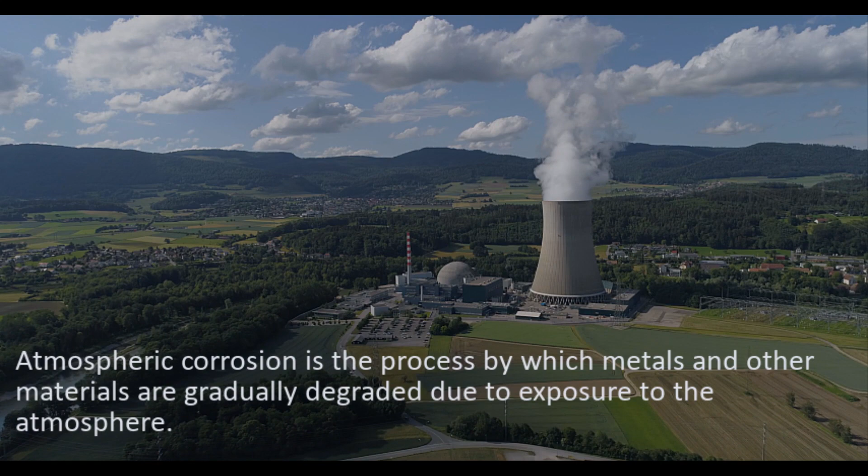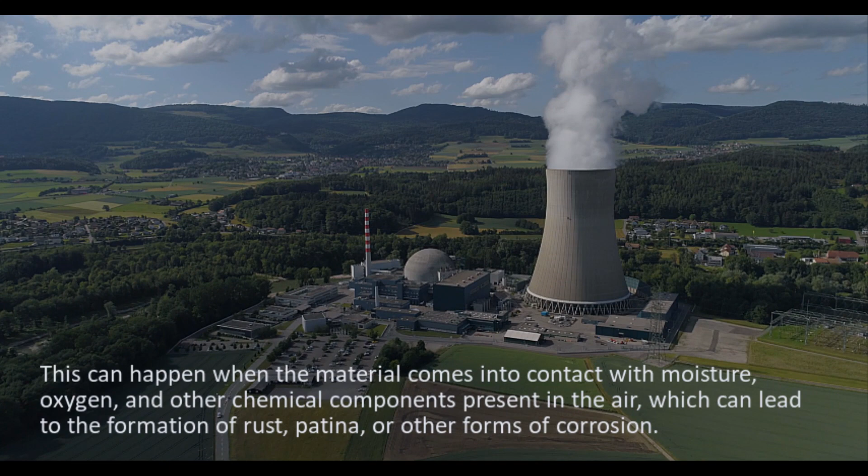Atmospheric corrosion is the process by which metals and other materials are gradually degraded due to exposure to the atmosphere. This can happen when the material comes into contact with moisture, oxygen, and other chemical components present in the air, which can lead to the formation of rust, patina, or other forms of corrosion.

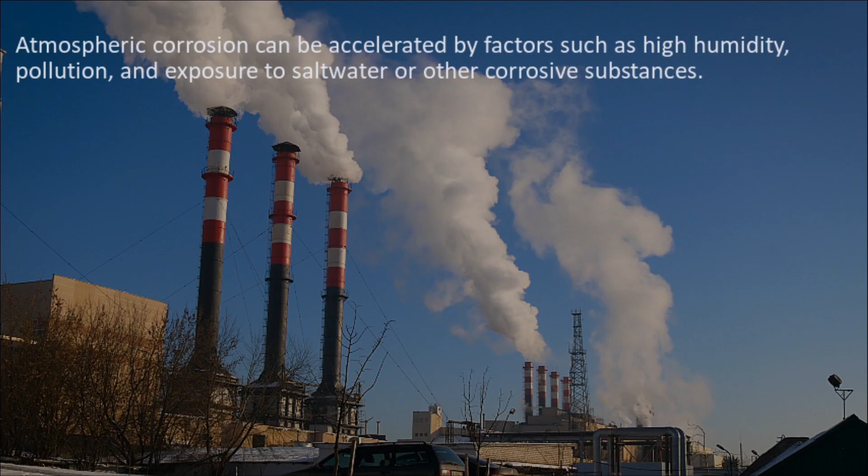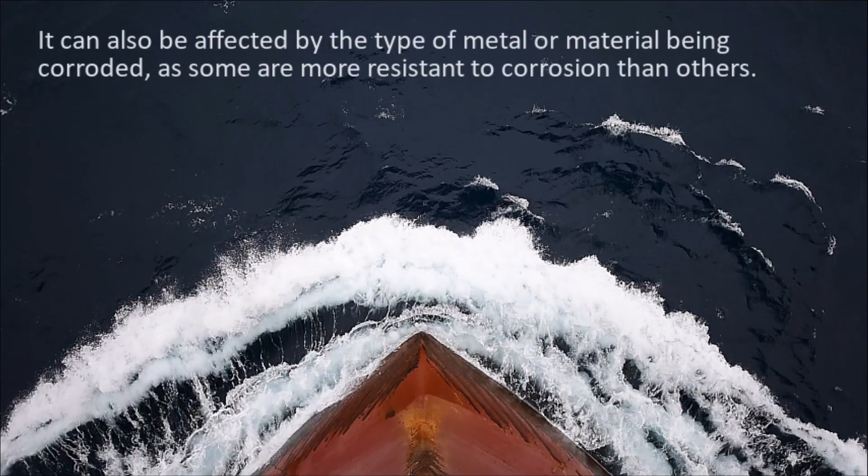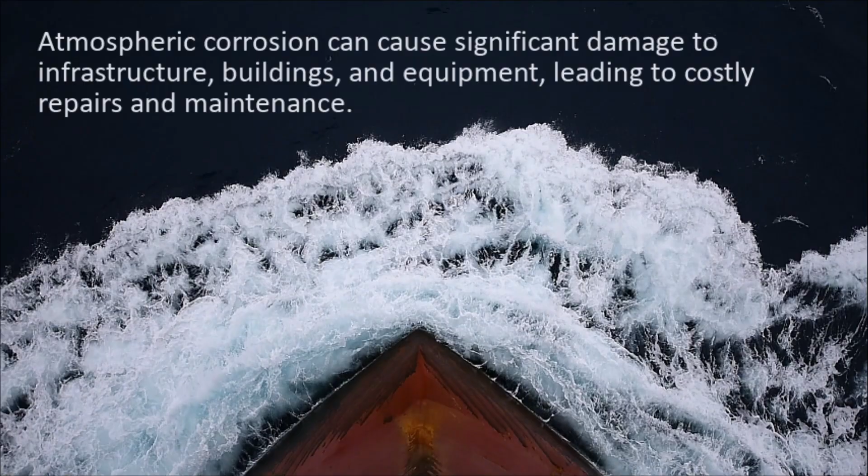Atmospheric corrosion can be accelerated by factors such as high humidity, pollution, and exposure to saltwater or other corrosive substances. It can also be affected by the type of metal and material being corroded, as some are more resistant to corrosion than others. Atmospheric corrosion can cause significant damage to infrastructure, buildings, and equipment, leading to costly repairs and maintenance.

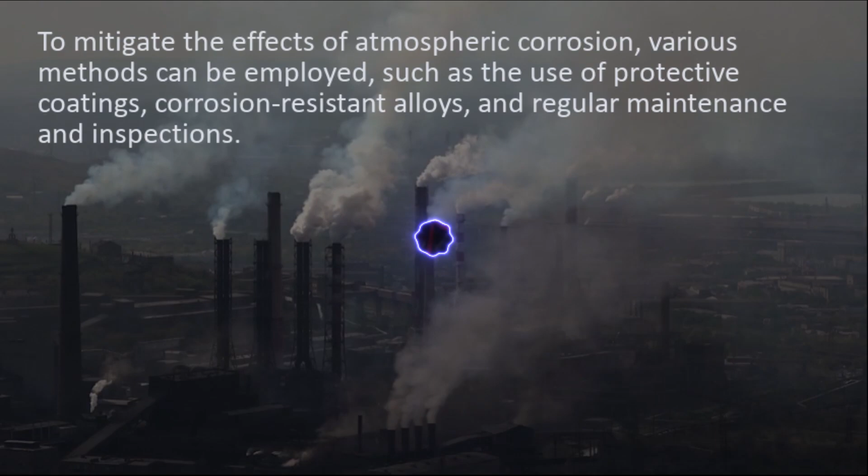To mitigate the effect of atmospheric corrosion, various methods can be employed, such as use of protective coatings, corrosion-resistant alloys, and regular maintenance and inspections. Corrosion that occurs from moisture associated with atmospheric conditions, marine environments, and moist, polluted industrial environments with airborne contaminants are the most severe. Dry, rural environments cause very little corrosion.

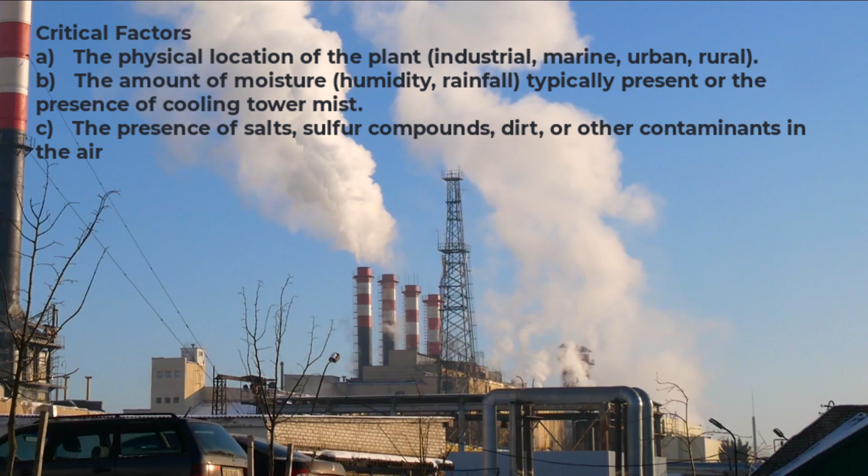Affected materials: carbon steel, low alloy steel, copper alloyed aluminium. Critical factors include the physical location of the plant, the amount of moisture, humidity and rainfall, the presence of salts, sulfur compounds, dirt and other contaminants, chlorides, H2S, fly ash and other airborne contaminants from cooling towers, orientation to the prevailing wind and rain.

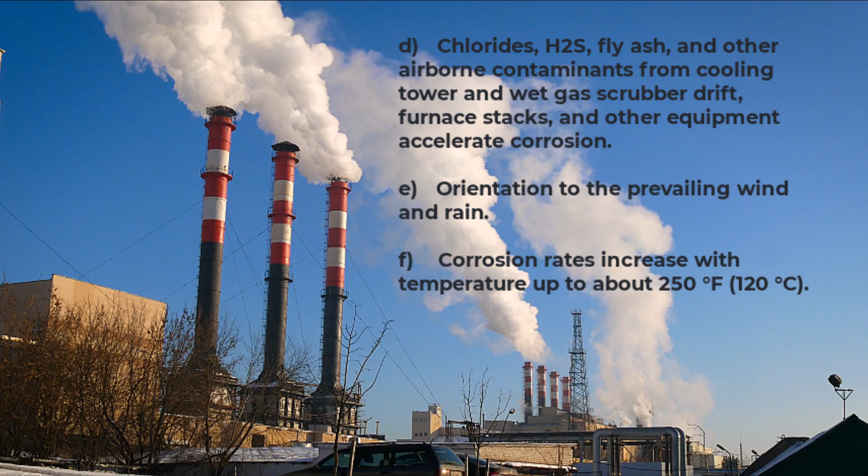Corrosion rate increases with temperature up to about 250 F, 120 C. Above 120 C, surfaces are usually too dry for corrosion to occur except under insulation. Designs that trap water or moisture in crevices; marine environments can be very corrosive, as are industrial environments that contain acids or sulfur compounds.

Inland locations exposed to moderate amounts of precipitation or humidity are considered moderately corrosive environments. Dry rural environments usually have very low corrosion rates. Bird droppings can also accelerate corrosion and cause unsightly stains.

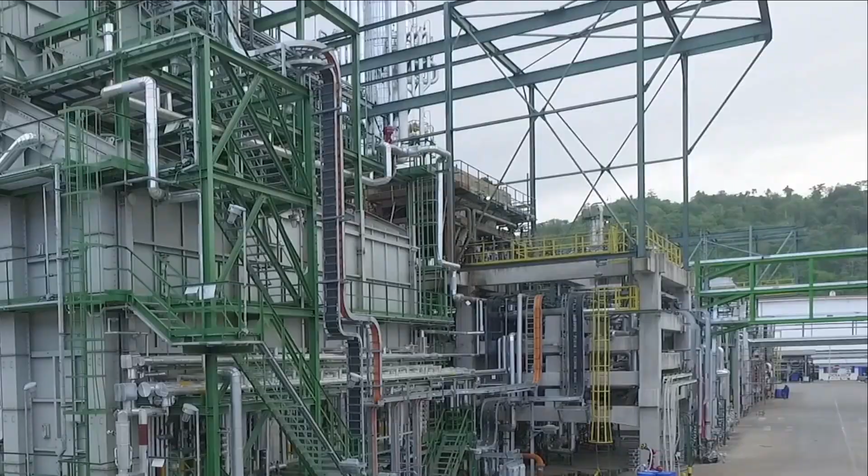Affected units or equipment: unpainted, uninsulated carbon steel and low alloy steel piping and equipment operating below 250 F, 120 C when moisture can collect on the surface. Equipment downwind of cooling towers, wet gas scrubbers. Equipment may be susceptible if cycled between ambient and higher or lower operating temperatures. Equipment shut down, idle for prolonged periods unless properly mothballed.

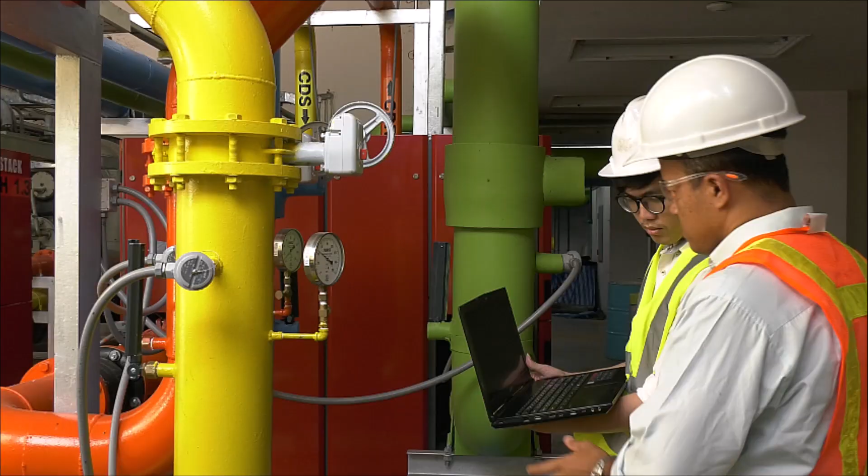Tanks and piping are particularly susceptible. Piping that rests on pipe supports is very prone to attack due to water entrapment between the pipe and the support. Piers and docks. Bimetallic connections such as copper to aluminium, electrical connections and such like.

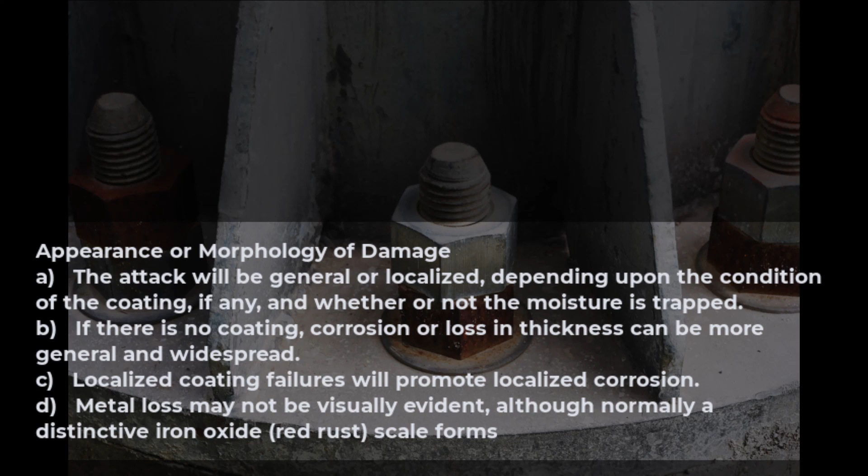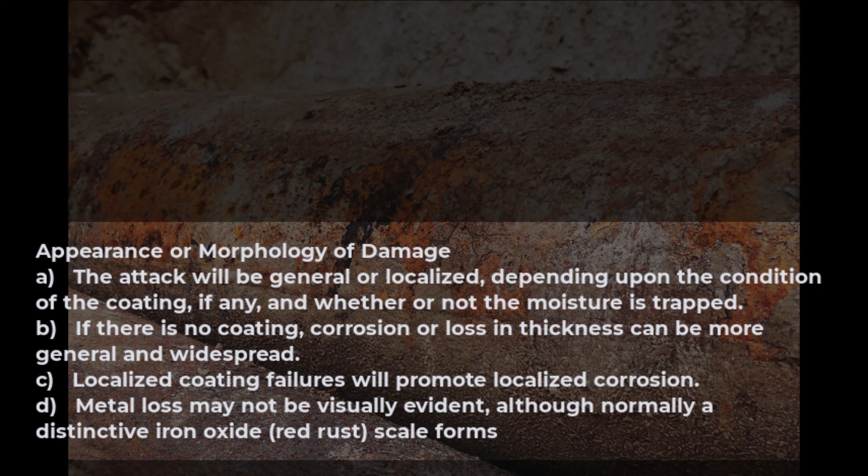Appearance or morphology of damage: the attack will be general or localized depending upon the condition of the coating, if any. If there is no coating, corrosion or loss of thickness can be more general and widespread. Localized coating failure will promote localized corrosion. Metal loss may not be visually evident, although normally a distinctive iron oxide, red rust scale forms as shown.

Prevention and mitigation: paints or coatings are normally applied to otherwise unprotected equipment to prevent atmospheric corrosion. Surface preparation and proper coating application are critical for long-term protection in corrosive environments.

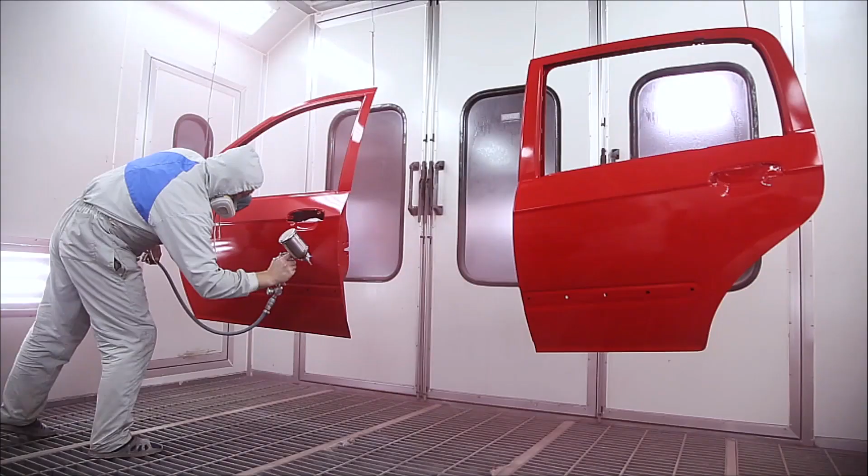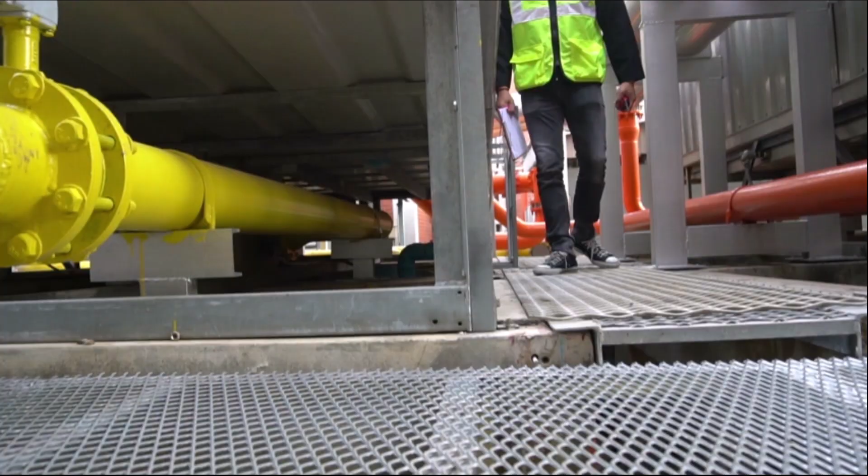Inspection and monitoring. Visual includes direct and line of sight and indirect methods using a camera, mirror, laser scanning and/or structured white light imaging with pit gauges. Ultrasonics can include techniques like straight beam or angle beam to directly measure remaining wall thickness, or screening techniques such as EMAT and GWT.

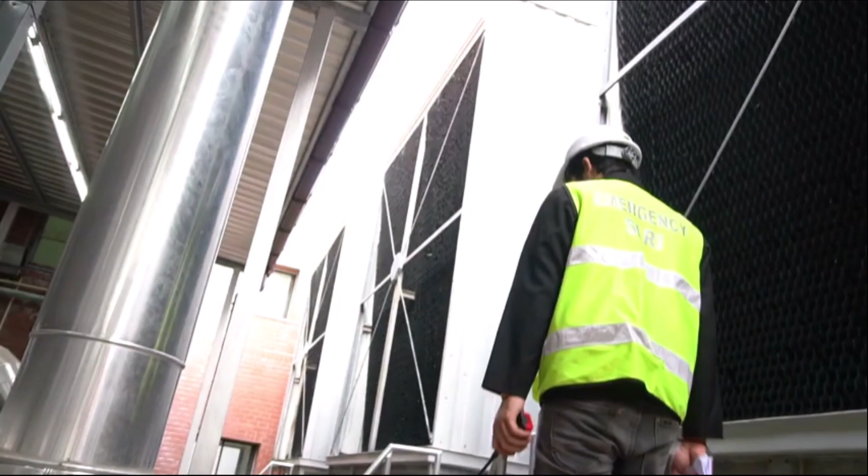Radiography may include traditional film-based, digital or computed radiography media, and may incorporate techniques such as contact or profile radiography, as well as system imaging. ECT may include a screening technique such as pulsed eddy current.

Related mechanisms: corrosion under insulation and concentration cell touchpoint corrosion. And that was API 571 atmospheric corrosion, and I'm still John Fletcher.